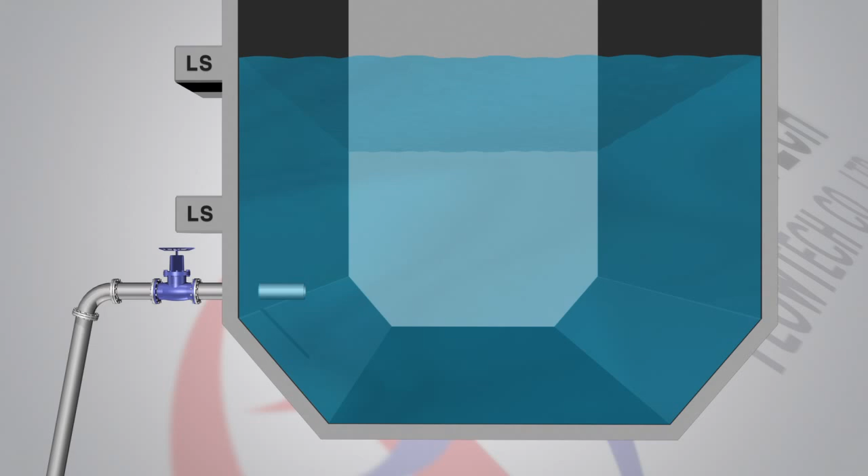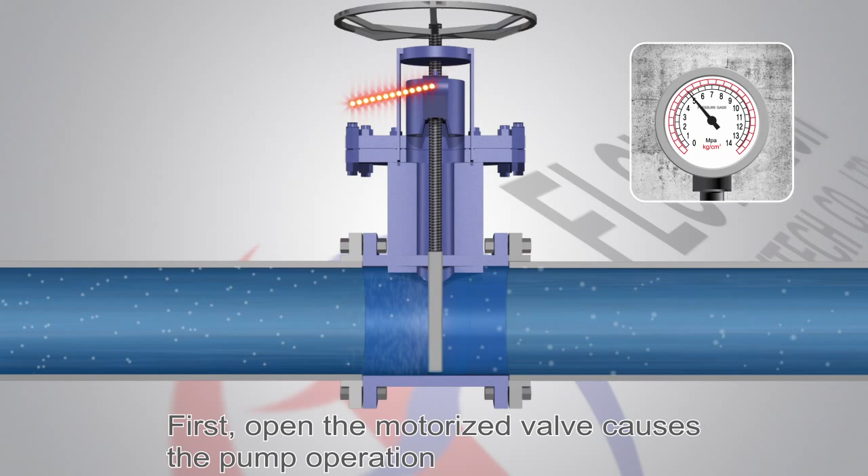Generally, pump operation starts by opening the motor-operated valve, an automatic valve, when the tank's water level is low, and then sending a signal to the pump when the valve is sufficiently opened. When the water sent by the pump fills up the tank to make the water level high, a signal is sent to close the motor-operated valve and then stop the pump.

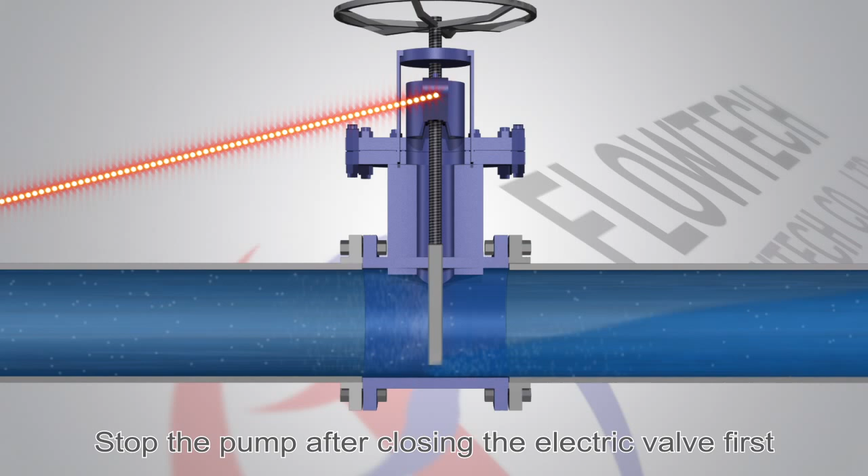The purpose of doing this is to minimize the change of flow velocity. Following this procedure, the pump can be stopped without the pipes being hit by a water hammer.

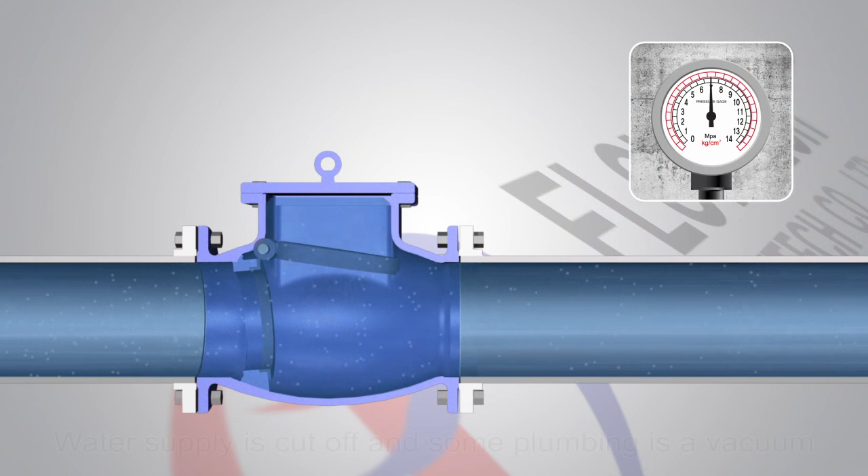When a stably operated pump suddenly stops due to a blackout or other factor, the pump's water supply stops and turns part of the pipes into a vacuum state. The transferred water moves until its energy lasts, then stops and moves backward. The pipe water moving backward damages the vacuum area with the water column phenomenon, and the check valve on the back of the pipe's exit generates a water hammer with a wham noise.

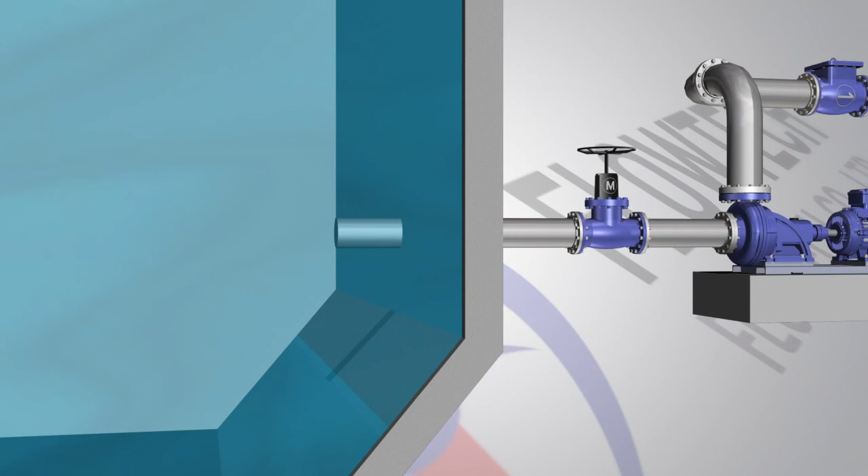Finally, the pipes are stabilized. As shown, a water hammer caused great noise and vibration, threatening the pipe system's safety.

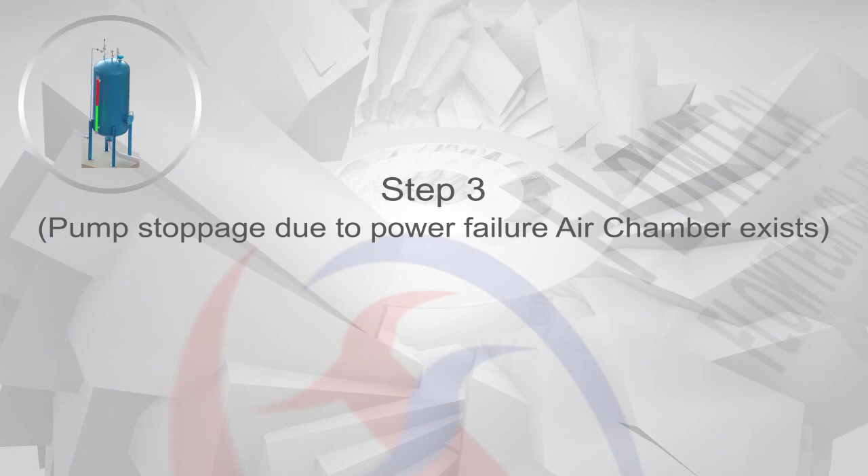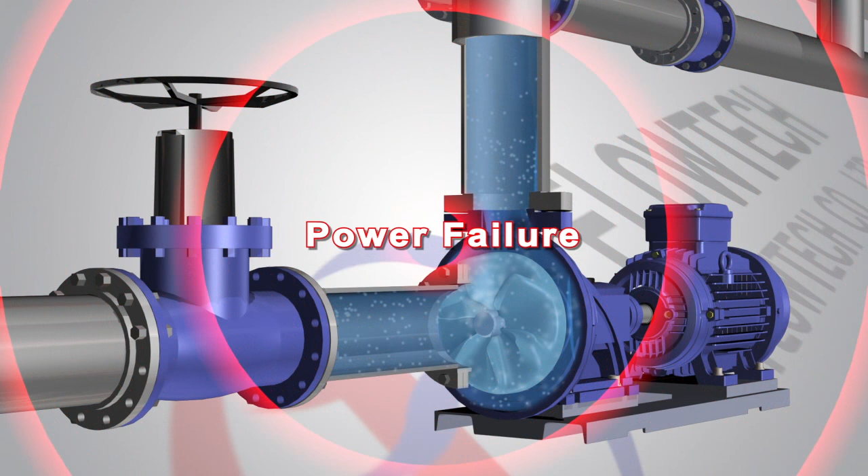Likewise, when a stably operated pump suddenly stops due to blackout or other factor, the pump's water supply stops. Then water stored in the air chamber is pushed by compressed air to prevent pipes from turning into a vacuum state. Basically, this method minimizes the energy of the water column, which flows back by preventing the water column from being divided.

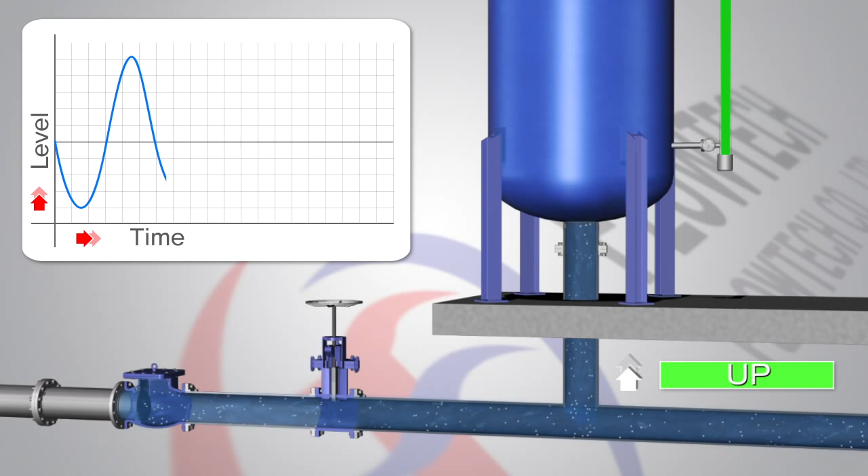The pipe water that flows back collides with the compressed air inside the air chamber to repeat flows to normal and operating directions until all energy runs out and the system is stabilized.

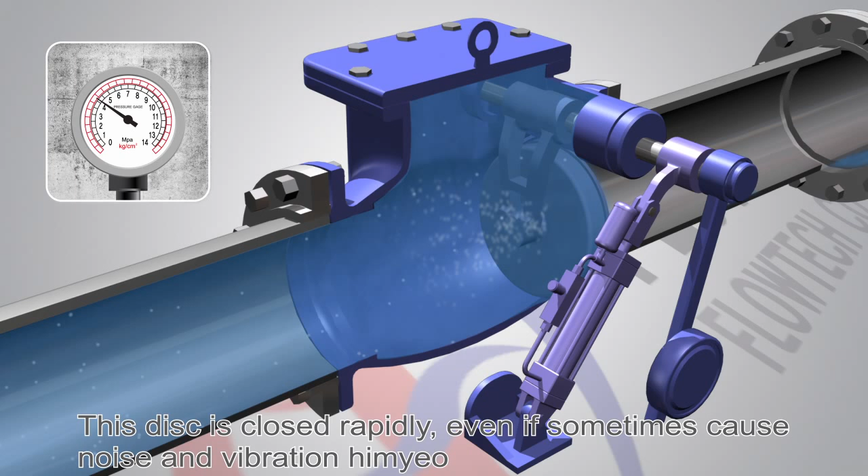Even in this case, when the pipe system's pump suddenly stops due to blackout or other factors and the water stored in the air chamber flows into the pipes, the check valve, a type in which one cylinder is attached, in spite of being a fully closed type, might not withstand pipe water from the air chamber and close rapidly, generating noise and vibration. Afterwards, the pipe water collides with the compressed air inside the air chamber to repeat flows to normal and operating directions until all energy runs out and the system is stabilized.

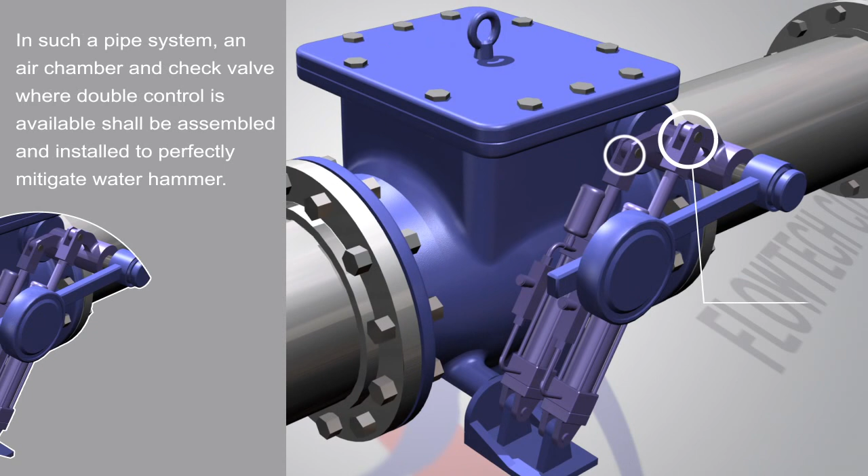In such a pipe system, an air chamber and check valve where double control is available shall be assembled and installed to perfectly mitigate water hammer.

When the pump suddenly stops due to blackout or other factors, and the water stored in the air chamber flows into the pipes, the one-step cylinder of the check valve, a type in which two cylinders are attached, operates to close the check valve disc by about 80%. The remaining 20% is slowly and stably closed by the check valve's two-step cylinder, while the disc withstands the pipe water.

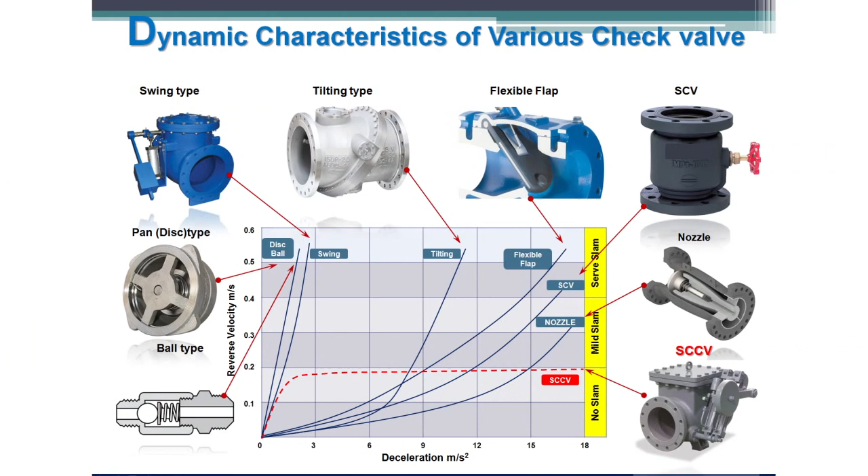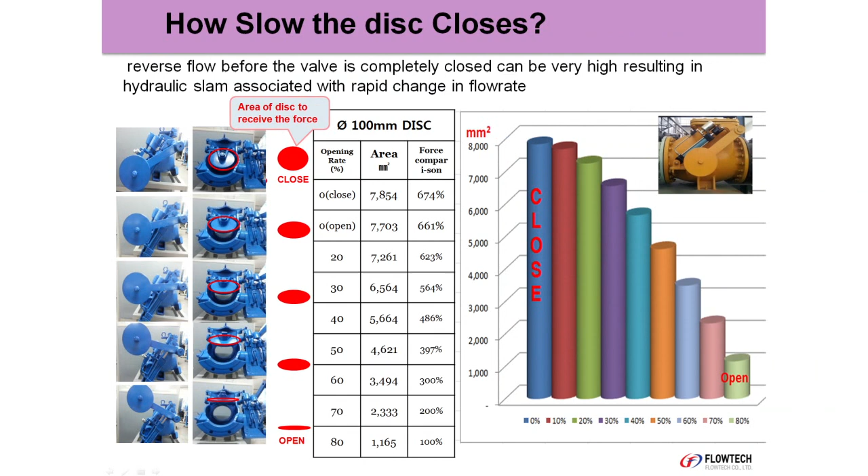Through technological innovation and nurturing of creative talent, Flowtech will protect people and property from water hammer, as well as build a happy world where all people of the world can live together.

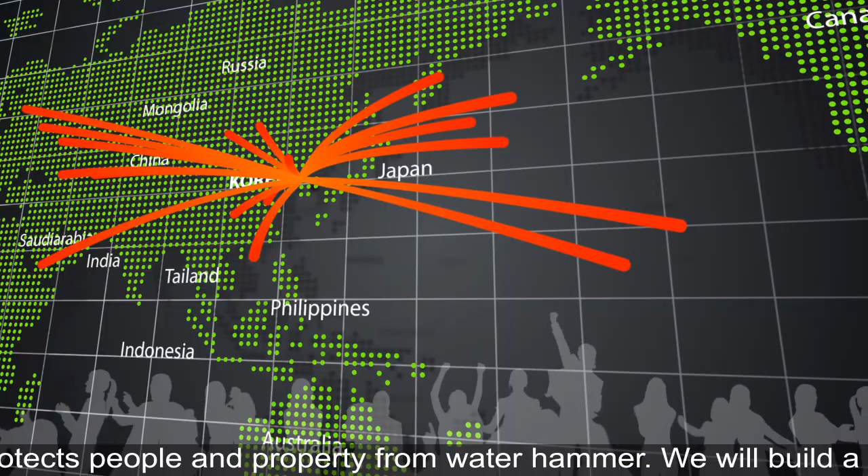Flowtech Corporation.